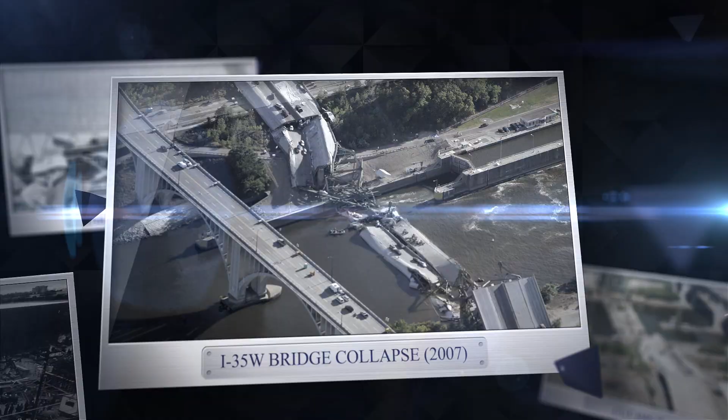From a theater filled with people that collapsed under the weight of a snow-covered roof, killing 98 people, to a hotel with glamorous walkways above a crowded lobby where 114 people tragically fell to their deaths due to a single design flaw, here are the 7 construction projects in the U.S. that didn't go as planned.

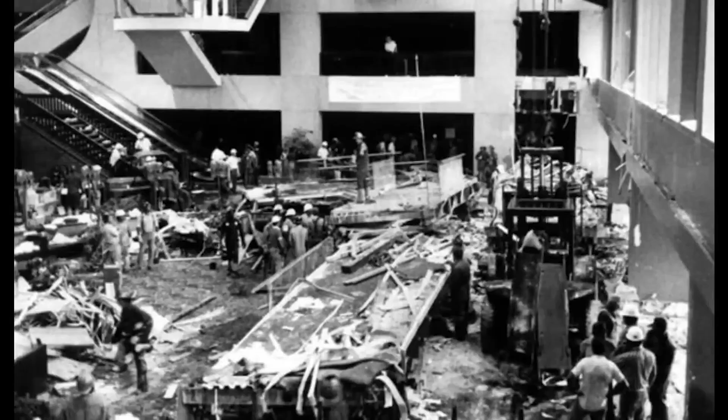Hyatt Regency walkway collapse, 1981. Our story begins at the Hyatt Regency Hotel in Kansas City. The hotel was a beacon of architectural elegance known for its modern design and luxurious ambiance. But on July 17, 1981, this symbol of sophistication turned into a site of tragedy. The hotel's grand atrium was packed with guests enjoying a dance party, unaware that danger loomed just above them.

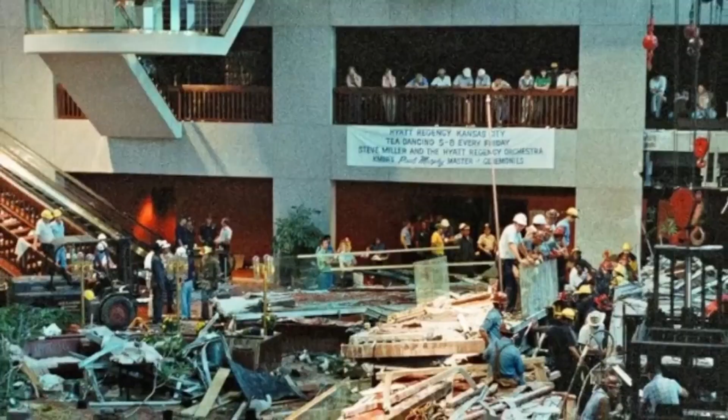But what was wrong that night? Well, 2 walkways suspended over the atrium had a critical design flaw. During construction, a last-minute change had been made to the supports. Instead of the original design, which would have distributed the weight evenly, the modification unknowingly doubled the load on key connection points. This meant the walkways could no longer bear the weight they were designed for.

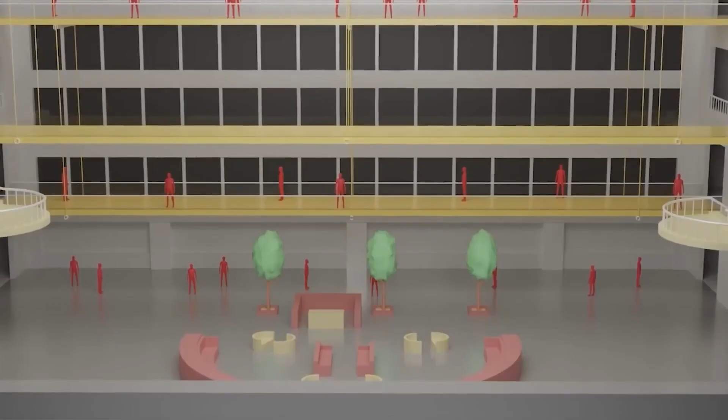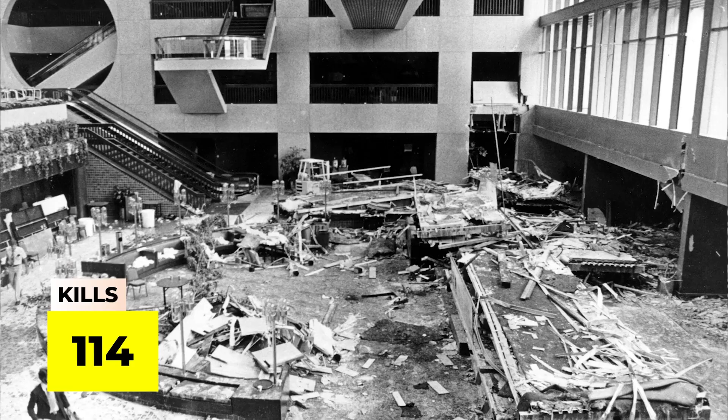Suddenly, the overloaded connections failed and the walkways collapsed, crashing down onto the partygoers below. In a matter of seconds, 114 people were killed and over 200 were injured. The aftermath revealed a chilling fact. Rigorous inspections could have caught the oversight. The design change wasn't properly assessed for its impact on load distribution.

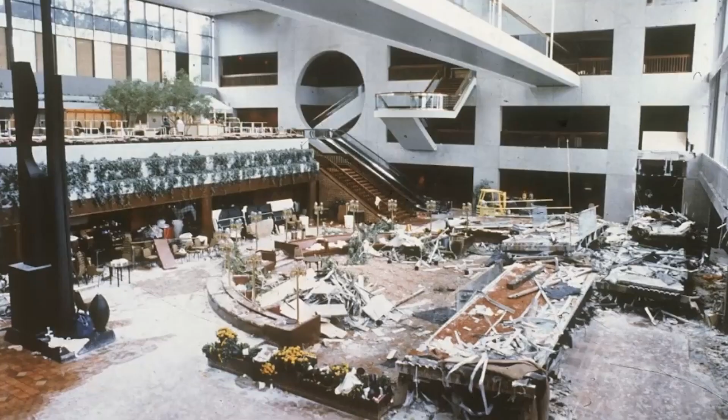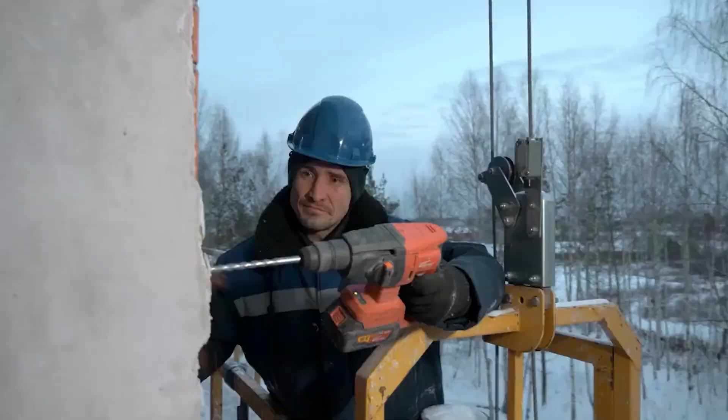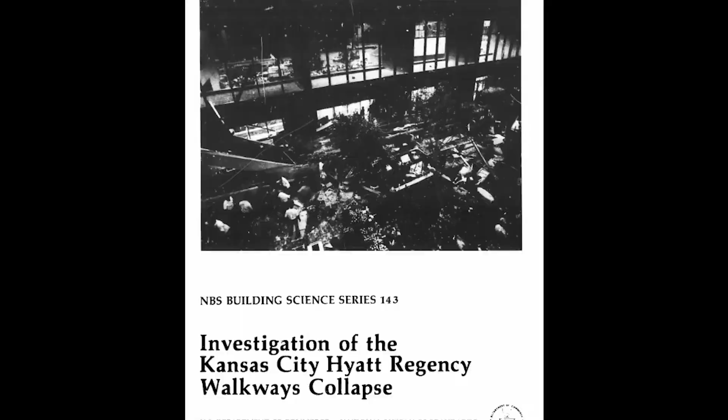But could the responsible parties have been held accountable? Yes. Following the tragedy, Missouri's Board of Professional Engineers launched disciplinary proceedings revoking licenses for key individuals involved, including the engineer of record, Jack Gillum, and his colleague, Daniel Duncan. Legal proceedings later upheld these findings, citing failures at multiple stages, such as Duncan's approval of a load-amplifying design change without thorough review and Gillum's failure to ensure soundness before finalizing the engineering plans. This incident underscored the need for comprehensive load calculations, strict adherence to design protocols, and rigorous inspection standards.

Champlain Towers South collapse, 2021. In Surfside, Florida, just past midnight on June 24, 2021, people were sleeping soundly. It was 1:22 a.m. when Champlain Towers South, a 12-story beachfront condominium, was quiet, lights flickering from a few late-night TVs and phones on chargers. Then, without warning, a massive section of the building began to crumble. Concrete and steel cascaded down, floors folding into each other like dominoes in the dark. A place that was home, a sanctuary, turned into an abyss of falling debris and muffled screams.

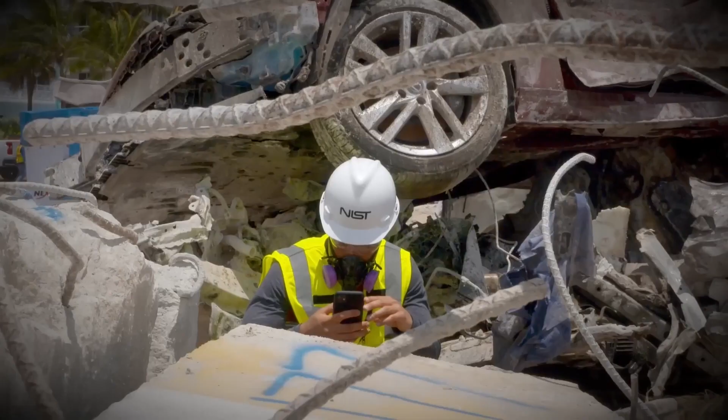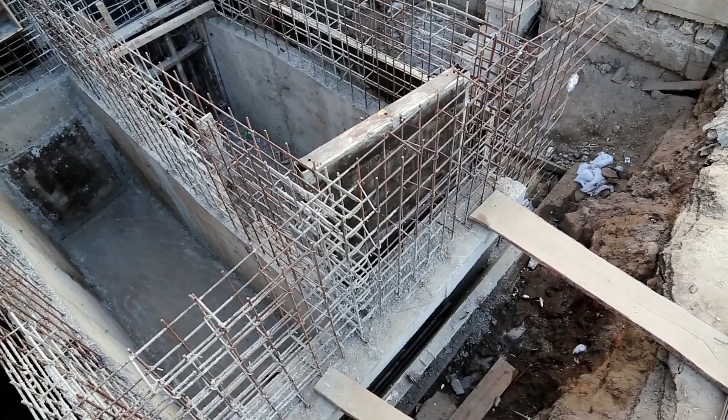98 people didn't make it. Many others were left injured, stunned by the chaos. What had gone wrong? Warnings had come years before. Engineers noticed signs: spreading cracks, weakened concrete, water seeping into walls and pooling where it shouldn't. Under the pool deck and inside the garage, concrete had been decaying for years. Florida's salt air gnawed at the structure, weakening it, exposing rusted steel and undermining its stability.

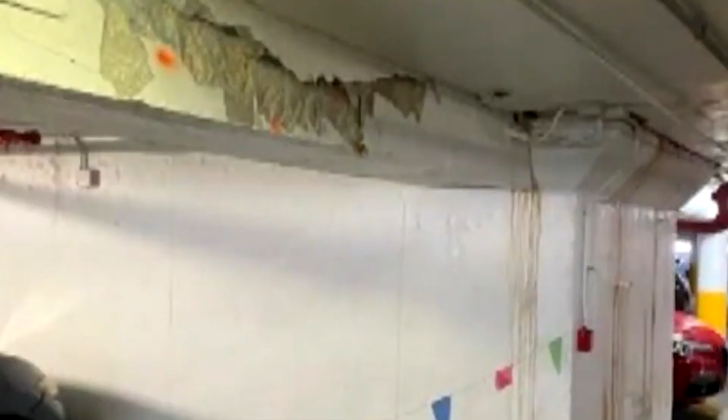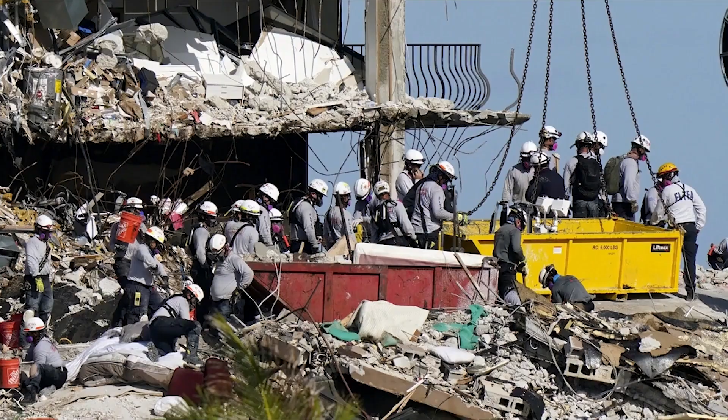And yet, repairs never came. Delays and debates over funding stalled urgent actions. There were meetings, documents exchanged, and promises made, but in the end, no one acted quickly enough. Water kept seeping in, the concrete kept rotting, time ran out. A lawsuit was filed the day of the collapse, a resident demanding answers from the Champlain Towers South Condominium Association. Families and survivors banded together, calling out everyone they could: the association, contractors, consultants. The lawsuits accused them of negligence.

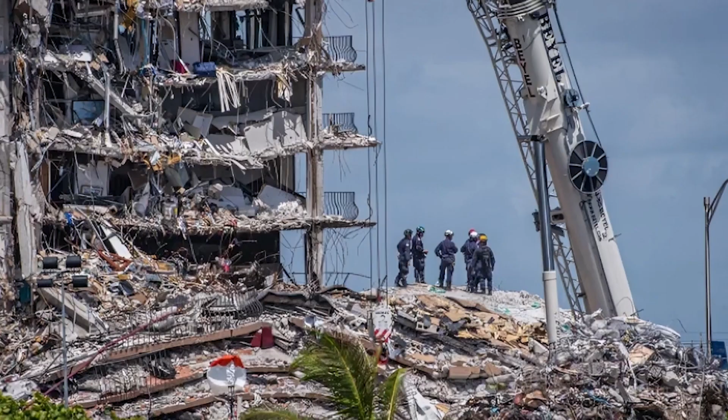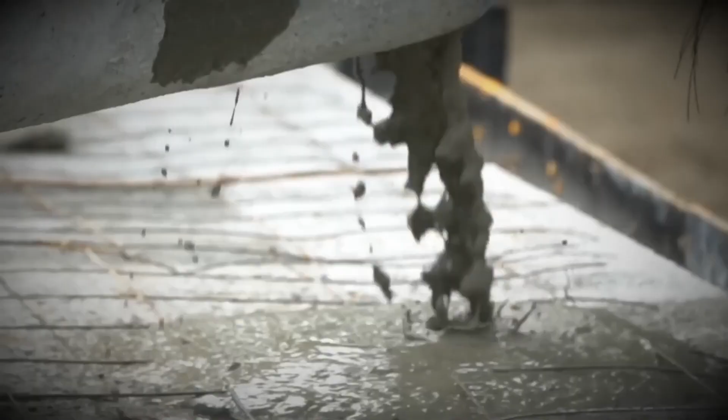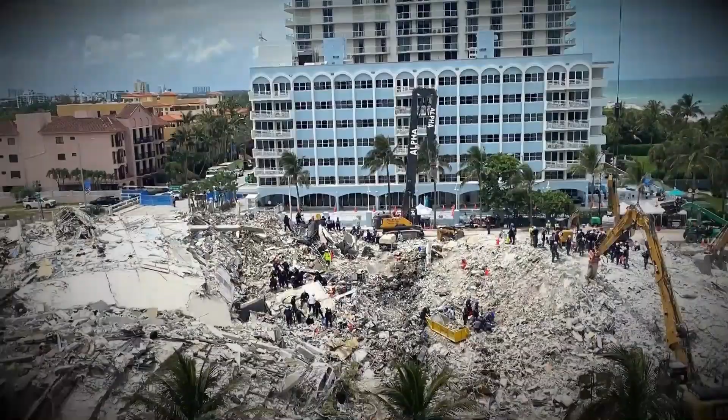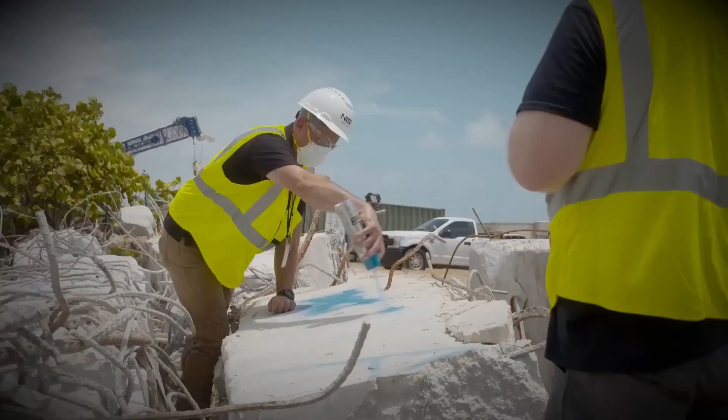And then in June 2022, a $1.02 billion settlement was reached, aiming at compensating survivors, families, and anyone left scarred by that night. The settlement included a hefty payout from a security company that failed to install a building-wide alarm system. No one faced criminal charges, but the cost was steep and insurance premiums skyrocketed for condominiums across the area. In Surfside, the echo of that collapse carried beyond legal battles. It pushed for new rules, stricter inspections, more oversight, especially for buildings vulnerable to Florida's weather. But for those who lost family, friends, and homes, the damage was already done.

Knickerbocker Theater collapse, 1922, Washington, D.C. A snowy January night in 1922, the Knickerbocker Theater was packed. It was the Roaring '20s, and the theater was a local icon, a place of music, laughter, and escape. Outside, snow had piled up for days, unrelenting, thick, wet snow blanketing the city. But inside, no one thought twice about it. They were there to relax, oblivious to the mounting weight pressing down above them.

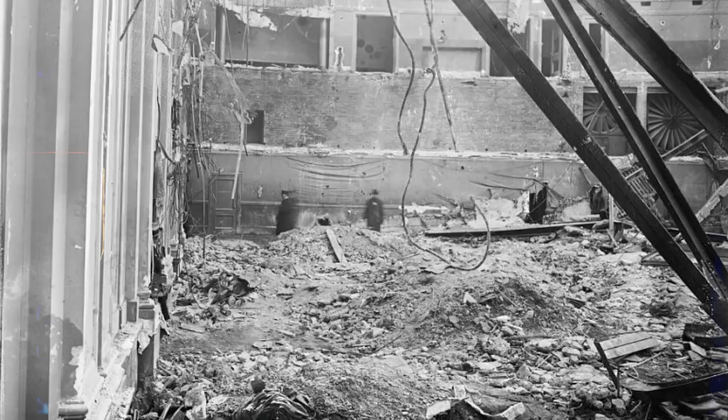Then, without warning, the roof groaned. In seconds, it buckled, crashing down into the crowd below. Beams and concrete shattered the seats, leaving screams in place of laughter. 98 people were killed, another 130 were injured. Why hadn't the roof held? Well, investigations would later reveal that the structure had no design safeguards for snow loads of that magnitude. The trusses were too thin, the beams too light. In the early 1920s, D.C. architects hadn't planned for such extreme winter weather.

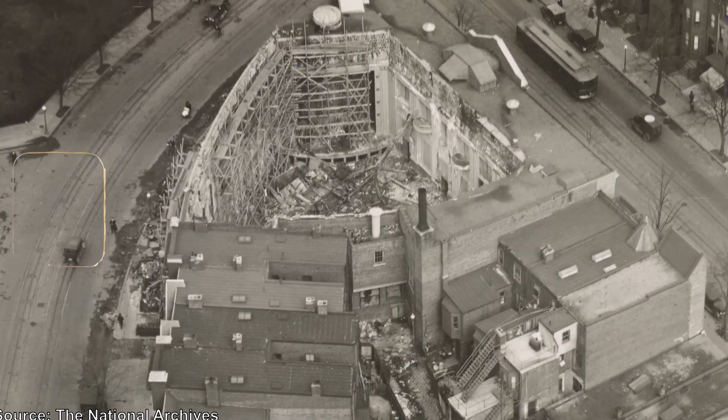The disaster's weight stretched beyond the theater walls, haunting the men responsible. Architect Reginald Geare, named in newspaper after newspaper, became a public figure of blame. He took his own life 5 years later. Theater owner Harry Crandall did the same in 1937, never escaping the shadows of the disaster. Yet this tragedy left an indelible mark on building safety codes, ensuring that such oversights wouldn't be repeated. But as the years passed, new risks surfaced in other corners of America, born to an industry eager to build fast, push limits, and reach new heights.

Willow Island disaster, 1978. 56 years later, West Virginia would see one of the worst construction accidents in U.S. history. It was April 27, 1978, and construction crews at Willow Island were rushing to finish a massive cooling tower at a power station.

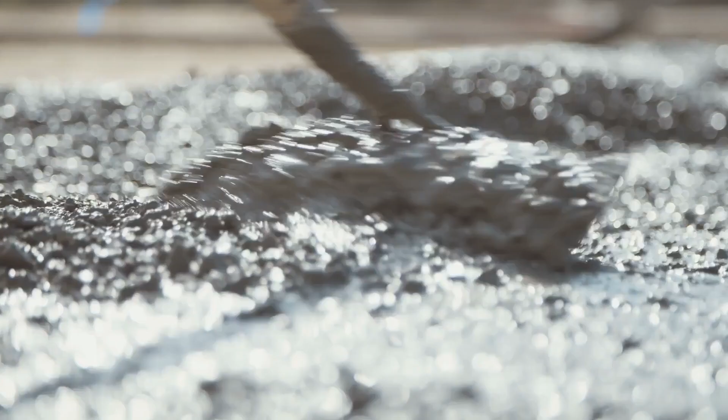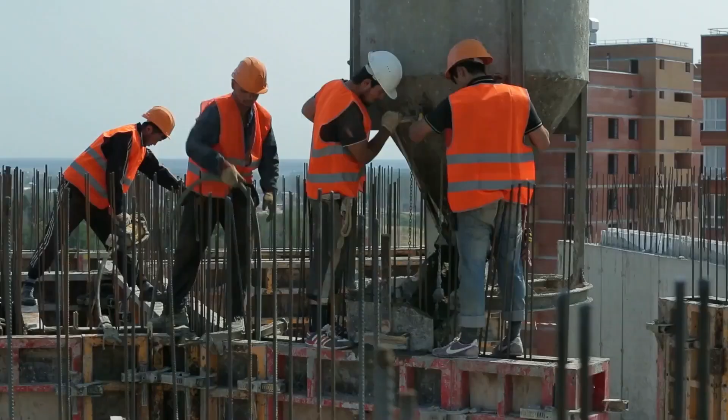The towering concrete shell, only half completed, stretched 50.6 meters high. On that spring day, 51 workers climbed the scaffolding, preparing to pour fresh concrete. The deadlines were tight and the pressure was constant, but the concrete from the last pour wasn't set.

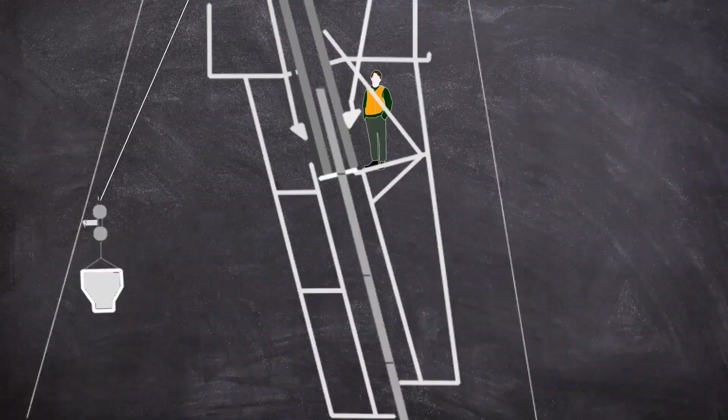The scaffolding that held it was shaky, and then, as they lifted new concrete to the top, the whole structure gave way. Concrete, scaffolding, and men crashed down together in a deadly wave of debris. Every worker in the tower perished. 51 lives were gone in seconds, leaving families and a stunned nation grappling with how such a failure could happen.

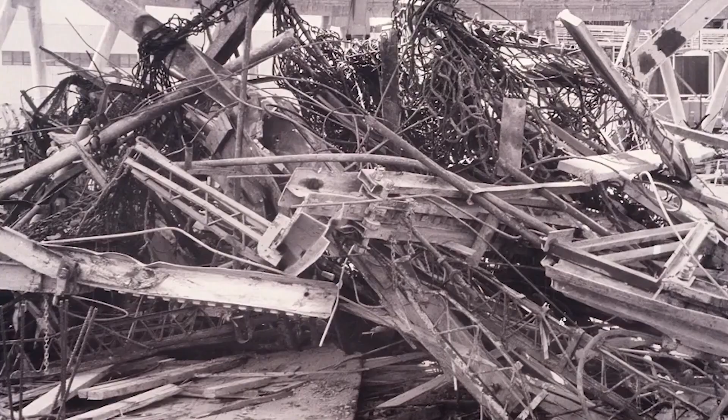The investigation was swift. OSHA charged the main contractor, Research Cottrell Incorporated, with serious safety violations, improper scaffolding, rushed timelines, and inadequate concrete testing. Fines were issued, regulations tightened, and construction sites across the U.S.

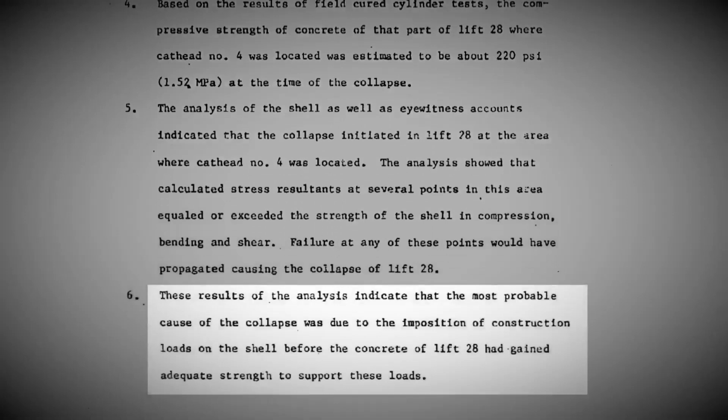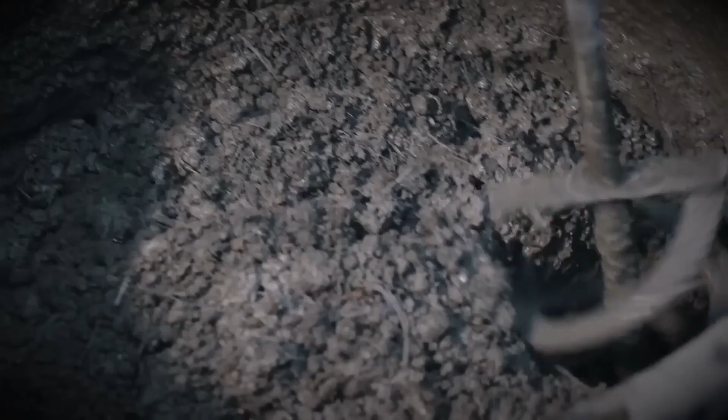began facing new inspections. The loss of life at Willow Island prompted contractors to rethink the balance between speed and safety, but the shadow of the neglect lingered, waiting to surface in another form in another place. 9 years later in Connecticut, a construction project was about to test this very balance again.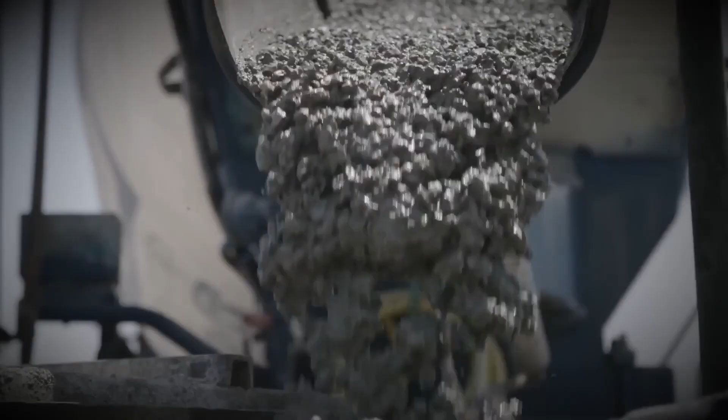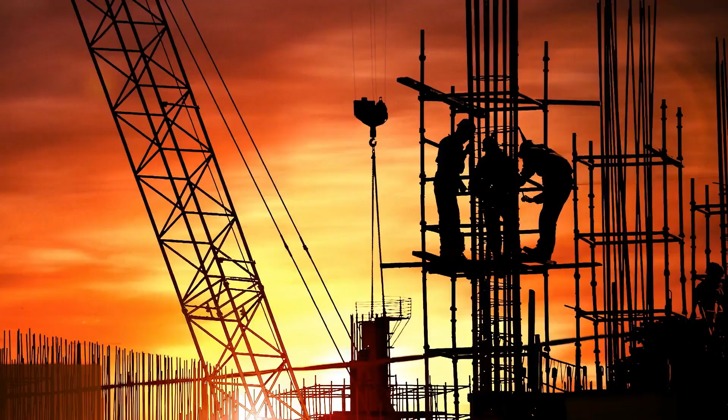Ambiance Plaza collapse, 1987. Bridgeport, Connecticut, April 23, 1987. Another ambitious project was underway, a 16-story apartment complex known as Ambiance Plaza. It was a symbol of modern innovation, using a new technique called lift slab construction to lift concrete slabs into place, forming each floor. The approach was cost-effective, faster than traditional methods, and increasingly popular. But had it been fully tested, fully understood?

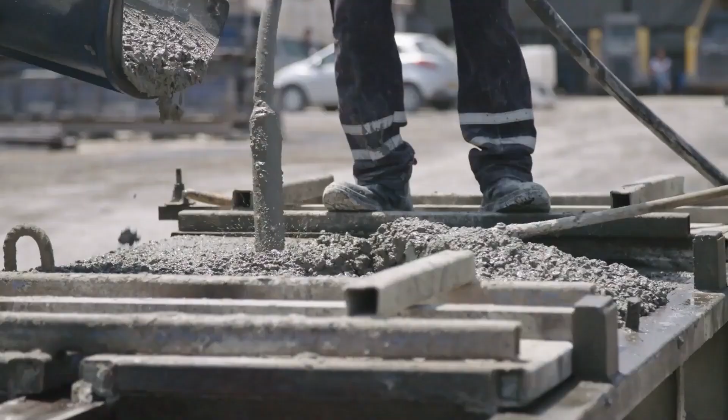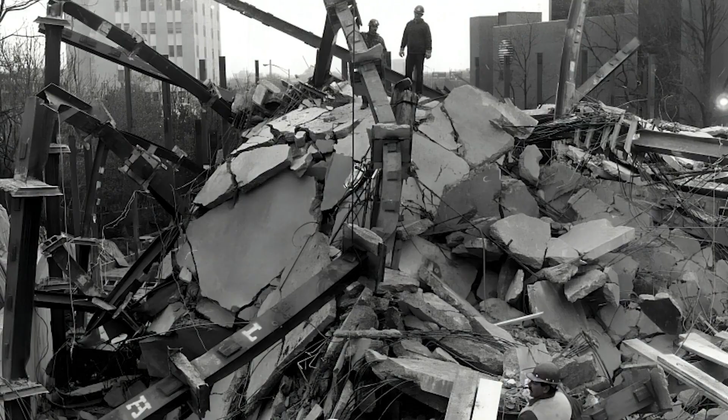As workers on the ground and on the slabs began their day, the jacks holding up the concrete floors began to buckle. Without warning, the structure gave way, and massive concrete slabs cascaded down like dominoes, trapping workers in the collapsing skeleton of a building. 28 workers were crushed and killed in the catastrophe. Rescue teams swarmed the site, battling both debris and the grim realization that few could have survived such a devastation.

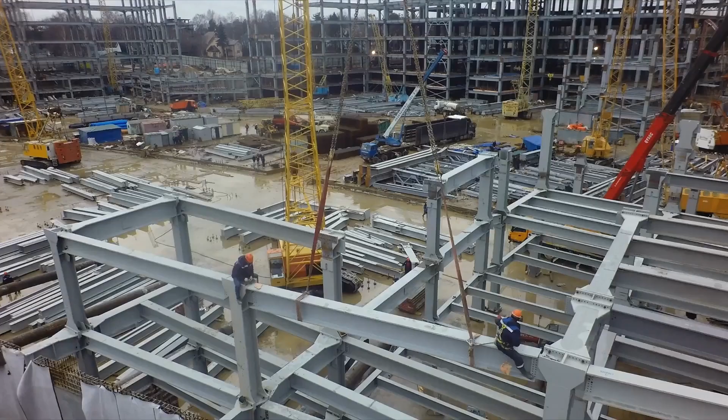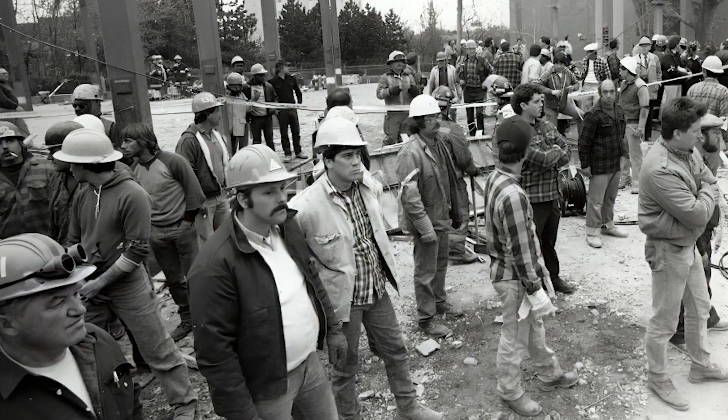The inquiries afterward revealed a shocking oversight. While the lift slab method was ingenious, it had never been proven reliable for high-rise projects. Safety protocols had failed to catch flaws in the supporting jacks, which crumbled under the structure's weight. The case led to a $41 million settlement implicating more than 20 parties in negligence. But with this settlement, investigations closed prematurely, and the exact cause of failure remained a mystery.

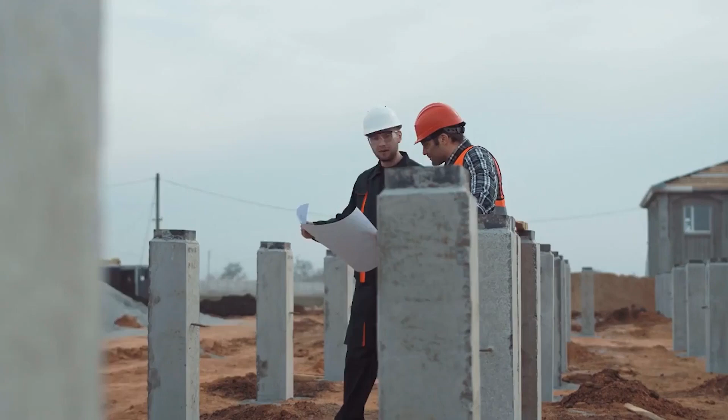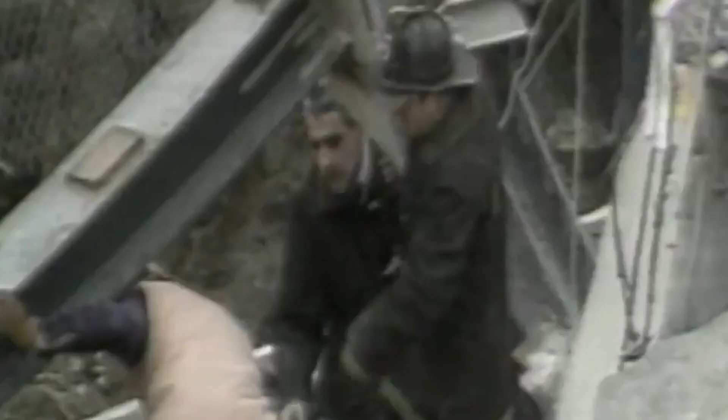The tragedy sparked urgent calls within the industry to slow down, to test and retest new methods before applying them on large-scale projects. As decades passed, these tragedies left a somber blueprint for the future of construction. Whether from neglect, haste, or untested innovation, the common thread remained. Lives were lost when corners were cut, when engineering safeguards failed, and when ambition outpaced caution.

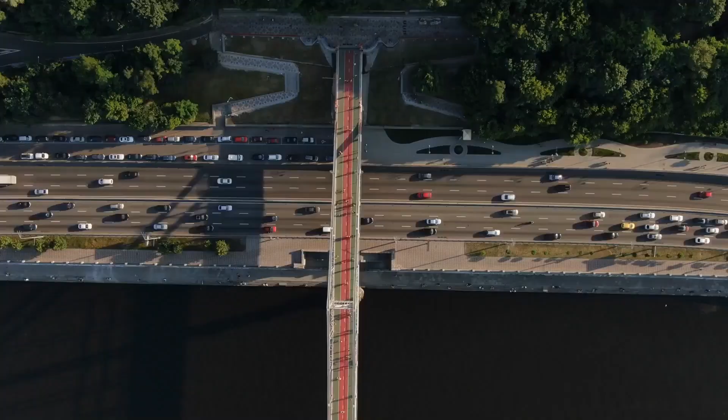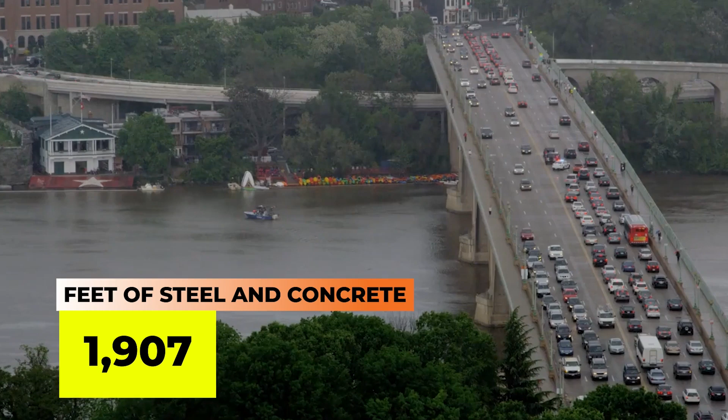I-35W bridge collapse, 2007. It was August 1st, 2007 in Minneapolis during rush hour. Thousands of cars packed the I-35 West Bridge, rolling bumper to bumper, parents heading home, friends heading out, kids in the back seat asking, "Are we there yet?" The bridge held them all, stretched over the Mississippi River, 1,907 feet of steel and concrete suspended above the water. Below, boats drifted lazily, unaware of the scene above. To those crossing it, the bridge felt as steady as it had for decades.

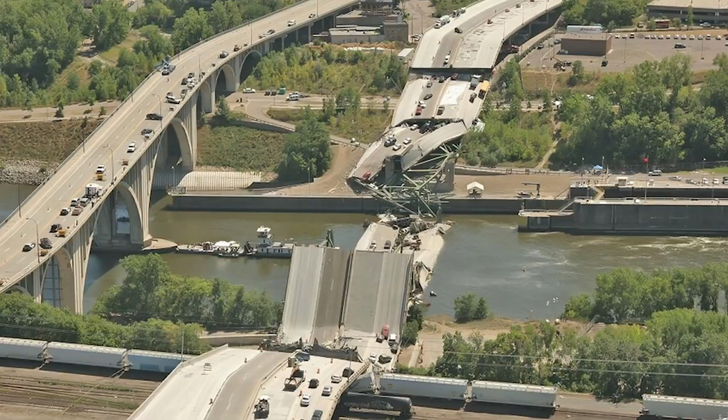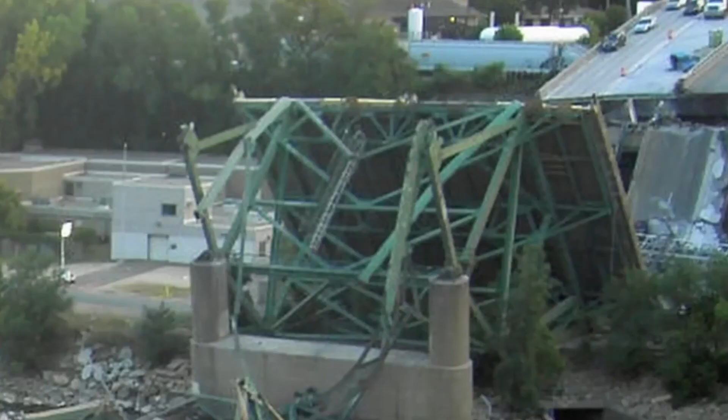Then, at 6:05 p.m., it happened. A loud rumble shook the air. Suddenly, concrete and steel gave way as the bridge buckled beneath the weight of 111 vehicles, construction equipment, and thousands of tons of steel. Within seconds, cars, trucks, and the bridge itself plunged into the Mississippi River, twisted metal and broken concrete scattering across the river and banks.

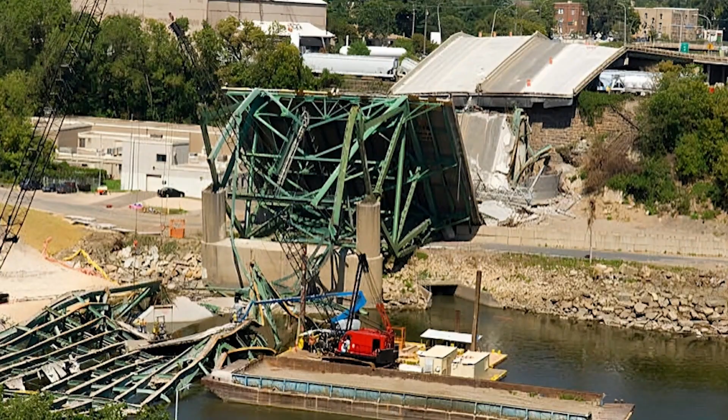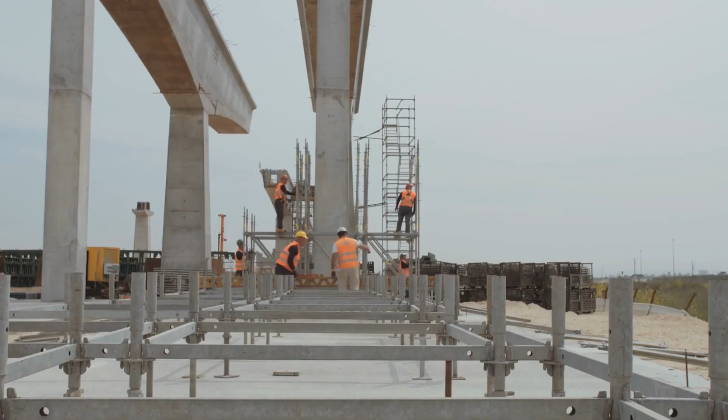How did this happen? For decades, a flaw lay hidden within the structure. Small but essential gusset plates holding beams together like bolts in a joint had been designed too thin. Over time, they weakened under the strain, their limits quietly eroding with every vehicle that crossed. On that day, they bore not just the usual traffic, but the weight of construction equipment added to the bridge for ongoing repairs. The plates buckled, and so did the bridge.

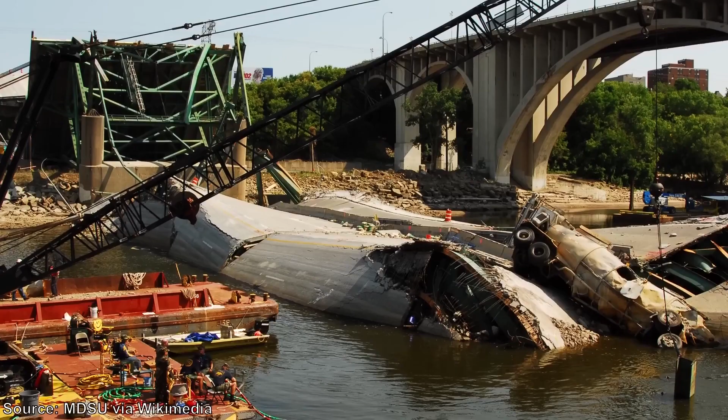13 people lost their lives that day. 145 others were injured. Those who survived found themselves clinging to the broken fragments of what, minutes before, had been an ordinary commute. In the weeks following, Minneapolis was flooded with questions. Lawsuits followed, pushing for answers, accountability, and justice. Families sought compensation for the lives lost.

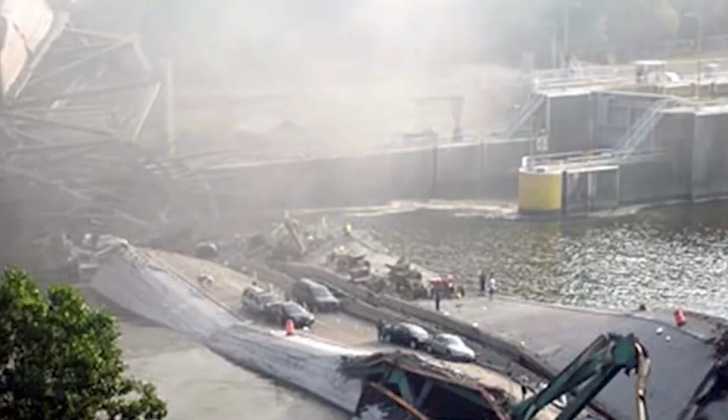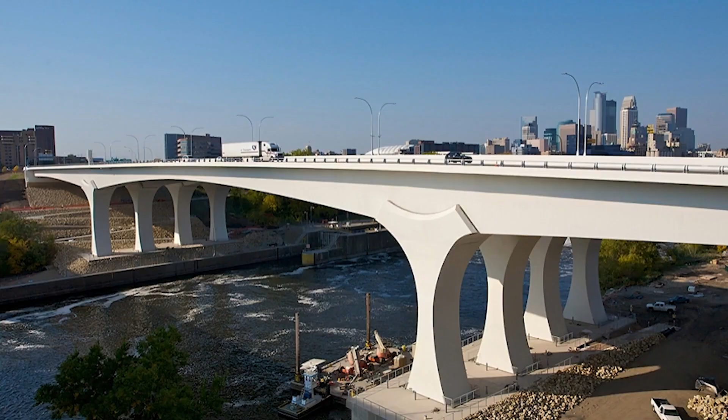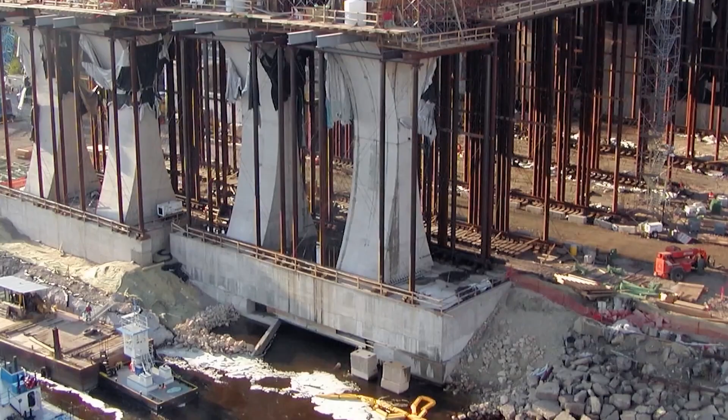Their lives changed forever. A $1 million fund was quickly established for victims and survivors, eventually growing to $38 million in 2008. But the demands didn't stop. In 2010, lawsuits against the construction companies were settled, awarding an additional $52.4 million. By 2012, a final lawsuit against the bridge's original design firm brought in $8.9 million, marking the end of the legal battles. Yet the impact of the collapse went beyond money and lawsuits.

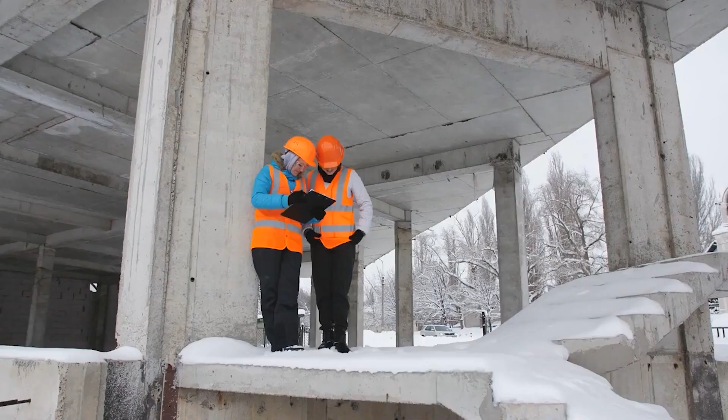The world of infrastructure took note. In Minneapolis and across the country, officials scrambled to tighten safety protocols, inspections, and oversight for aging structures. Every bridge, every tunnel, and every piece of infrastructure suddenly felt suspect. Even in the most modern world, small, overlooked flaws can bring down giants, and the cost of that neglect can ripple far beyond the moment, changing lives forever.

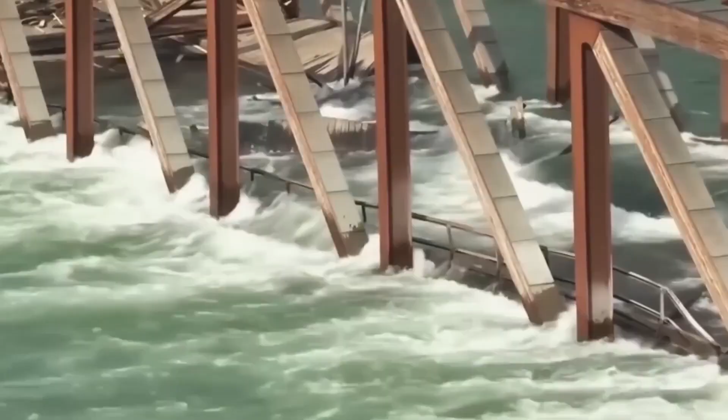So what do you think? Are we learning enough from these disasters to ensure the next big project doesn't become a tragedy? Or will we continue to pay the price for overlooked flaws?